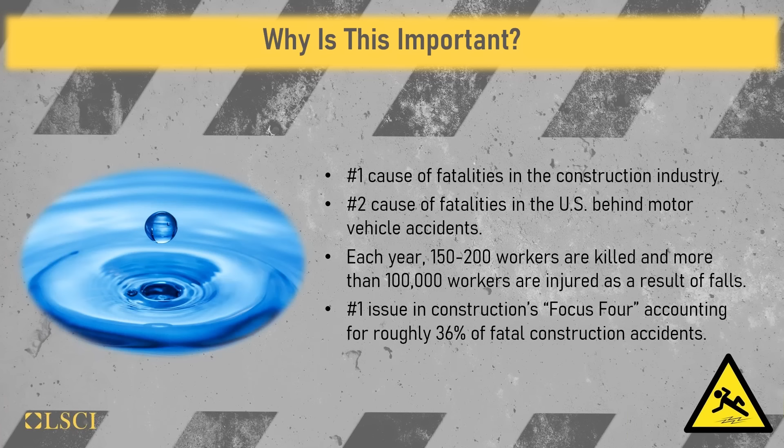As we now know, falls are the #1 cause of injury and fatality in the construction industry. Over 100,000 injuries and 150 to 200 fatalities are caused every year by falls. This number is absolutely unacceptable. As an employer, you do have a responsibility to understand and protect employees from the hazards and unsafe workplace conditions. There are a number of fall prevention and protection methods that are often overlooked or bypassed.

So before we get started talking about falls in more detail, let's take a quick quiz. Where do you think most falls occur in the construction industry? A, scaffolds, B, ladders, C, platforms, D, roofs, or E, A and D. Go ahead and take a minute to look this over and type in your answer to the chat box.

Alright, time's up. So where do most falls occur? The answer is E, falls from scaffolds and roofs.

Falls commonly happen from unprotected sides and holes, walking and working surfaces that are not constructed properly, improper use of equipment to access heights, failure to properly use a personal fall arrest system, and lastly, slips and trips caused by poor housekeeping.

Exactly, Emily. And while a majority of falls happen from heights of 11 feet or higher, many injuries and fatalities can also occur from falls on the same level or just a few feet off the ground.

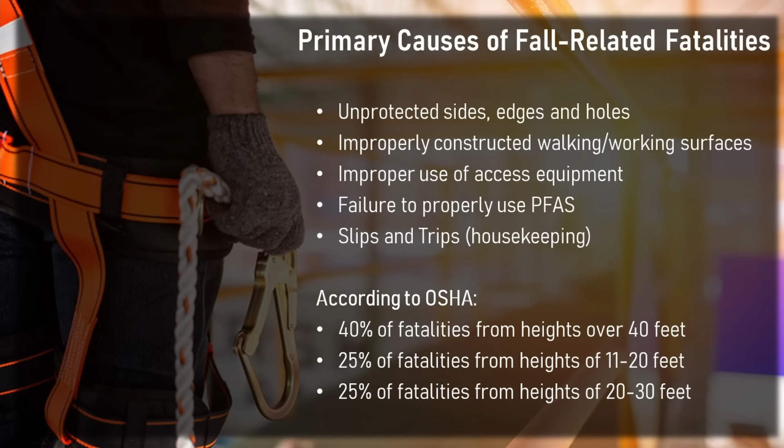You can't put a price on an employee's life, but these costs could have been avoided entirely with the right methods of prevention and protection. I refer you to 29 CFR 1926, the OSHA safety and health requirements for construction. Subpart M will give you a lot of detail on dimensions and placements, so we're not going to go into a lot of detail in this presentation today. Please refer to Subpart M for additional information.

Before we talk about the types of fall protection used in this industry, let's take another quiz. At what height is fall protection required in construction work environments? A, 5 feet, B, 6 feet, C, 7 feet, or D, 8 feet? Take a minute to read over the answers and put your answer into the chat box.

The correct answer is B, 6 feet. Fall protection is required when employees are working from a height of 6 feet or more above a lower level, or on walking surfaces where they could fall 6 feet or more into an excavation or opening. It's important that all work surfaces be inspected prior to work to ensure that the surface is strong enough to support the work being performed.

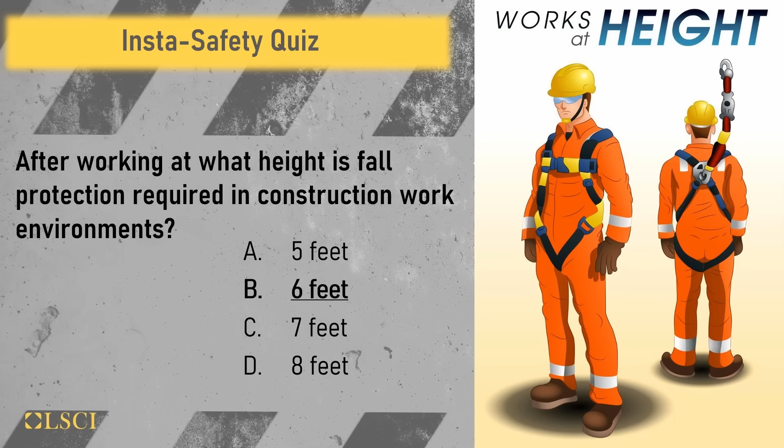Now that we've taken a look at that, let's take a deeper look at fall protection. When do you as an employee need to be protected from a fall hazard? As we just reviewed, OSHA requires that fall prevention or protection be provided for employees working in construction environments at heights of 6 feet or greater.

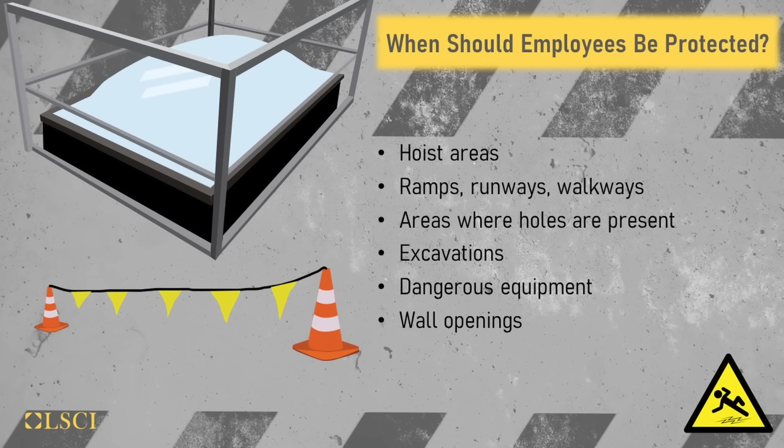That's absolutely correct. So let's look at some specific areas where fall protection is required by OSHA standards: working in a hoist area, moving materials to an upper level or taking debris down to a lower level; working in elevated areas such as ramps, runways, or walkways; areas where there are holes, which should be covered to protect employees from tripping or stepping into them. Covers should be marked, secured, and able to withstand 2 times any imposed load on them. Also, working near wall openings, windows, doors, etc., or when dangerous equipment is present below the work surface, as well as working in or near excavations.

There are many different ways we can protect employees from suffering a fall-related injury or fatality, so let's talk about some of these options. First off, safety nets, an option for fall protection whenever you're working in high-rise buildings. Safety nets have to extend at least 8 feet outside of the working surface, though that can also depend on the height of the working surface to begin with. Once constructed, these safety nets have to be inspected to ensure their integrity and make sure they would be safe to use if a fall were to occur.

Yes, safety nets are an excellent option in a variety of areas, not just high rises. Next up, we have guardrail systems. Most people are familiar with guardrails; they're commonly used to prevent an employee from being exposed to a fall hazard and suffering from a fall. To provide sufficient protection, guardrails must meet these requirements: first, the top rail height is typically 42 inches, plus or minus 3 inches, above the walking working surface. Second, a mid-rail is installed about halfway between the top rail and the working level, usually around 21 inches. Toe boards, if installed, help prevent objects or materials from falling into areas below; they're at least 3.5 inches high, not more than a quarter inch above the walking working surface.

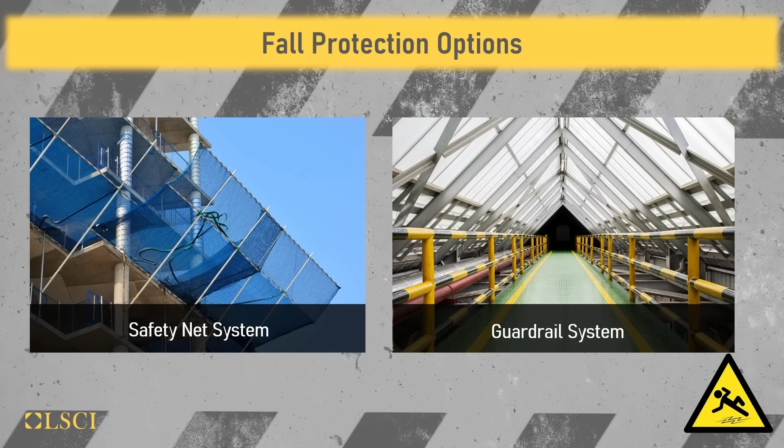Moving right along, we're now going to talk about warning lines. Warning lines are commonly used on roof areas to identify the areas in which work can occur safely without fall protection and where work cannot occur if fall protection is not used. So warning lines are used to warn employees of an unprotected edge. Essentially, a warning line system is a means to provide a visual warning of where work can and cannot be performed. To be compliant with warning line system requirements, the following must be met.

The lines used for warning lines are to be made of ropes, wires, or chains. The lines must be placed no less than 6 feet away from the edge, meaning if working more than 6 feet from the edge and within the warning line area, additional fall protection is not required. But if working past the warning line system and within 6 feet of the roof's edge, additional fall protection must be worn. The warning lines must also be set up to withstand tripping force of 16 pounds, and the lines must be constructed so the line is no lower than 34 inches, but also no higher than 39 inches.

It's important to note that for roof work or any other work occurring where warning lines are used, work cannot occur until after the warning line system is properly set up and providing that visual. So if the warning line area is not yet set up, work cannot occur near the unprotected edge, even if you are more than 6 feet back. You do need to have things set up and be in place properly before you can work without fall protection.

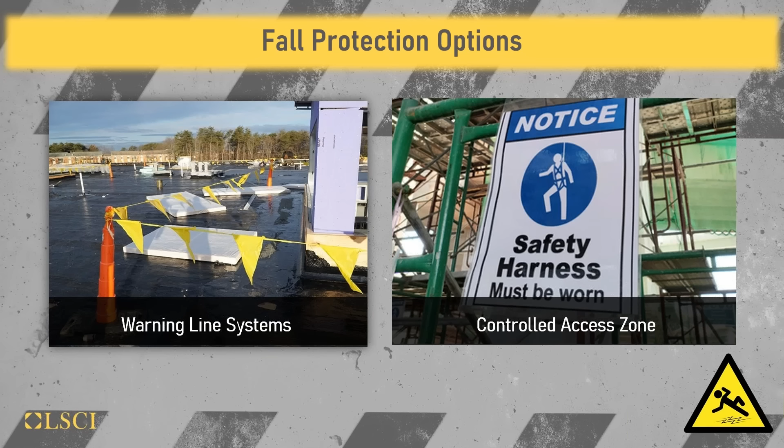These controlled access zones can be set up no less than 6 feet, but no more than 25 feet away from an unprotected edge. Once the area is set up with ropes, wires, or chains, they must be flagged with highly visible material at least every 6 feet. Controlled access zones are often used for roofing work, leading edge work where floors are being constructed, masonry, and other types of work.

Let's review safety monitoring systems. A safety monitoring system includes an employee that is designated to prevent workers from falling from the leading edge. It's commonly used in the roofing industry, where the safety monitor is responsible for watching employees in the working area to ensure that a fall does not occur, and the sole responsibility is the monitoring of employees.

The safety monitor must be able to communicate verbally with the employees in the work area, and they must always be able to see the employee that they're monitoring where the work is occurring. Should there be an increased chance of a fall hazard or the monitor sees the employee not working safely, the safety monitor does have the competency and the authority to stop the work and keep the employees safe. Any employees in the area must follow any directions given by the safety monitor.

The safety monitor can't have any other responsibilities that could take their attention away from the ones that they are monitoring. One thing to note about the safety monitoring system, there are restrictions. For example, OSHA asks that this be used on no greater than a 4:12 pitch type or flat roof. There are additional dimensional requirements for using a safety monitor.

Another option that is very popular is the personal fall arrest system. Guardrails and personal fall arrest systems seem to be the most common types of fall protection we see on projects. They include a personal harness connected to a lanyard with snap hook and D-rings, attached to an anchorage point capable of withstanding and sustaining 5,000 pounds of force. A personal fall arrest system must limit a person's free fall to no more than 6 feet.

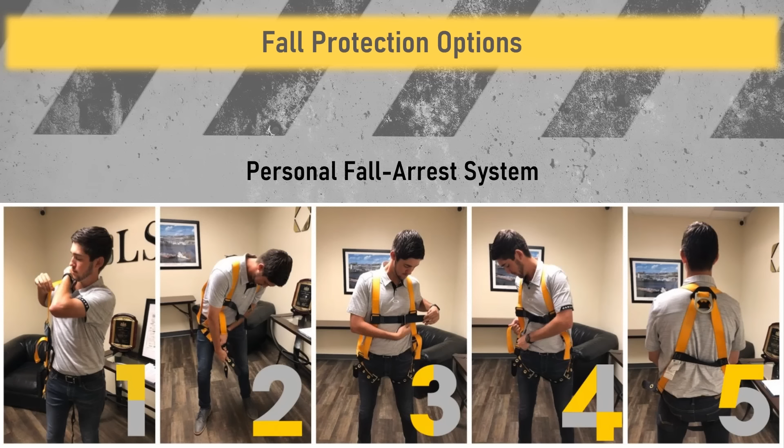For example, if a fall does occur, the personal fall arrest system limits the maximum arrest force to 1,800 pounds. Here we have an example of the proper way to put on a personal fall arrest harness. Prior to using the system, all components should be inspected by the trained user. Any defect found must be repaired, replaced, or taken out of service. I also recommend using the buddy system so people check each other, making sure the harness is donned correctly—snug enough to do its job, but not so tight that you can't do the work.

We are going to look a little closer at these components of a fall arrest system. We commonly refer to this as the ABCs of fall arrest systems. The A stands for anchorage, commonly referred to as the point where you are tying off—the connection point used to connect you to the point of anchor.

B stands for body wear, which is the personal fall arrest harness that goes around your body. C stands for connecting device, and this is the critical link that joins the body harness you're wearing to the anchorage point—this would be something such as a self-retracting or shock-absorbing lanyard.

There's a variety of options for personal fall arrest systems—take a look and find the one that works best for your kind of work. One common question is, what's with this 5,000 pounds at the anchorage point? I don't know any 5,000 pound people or 1,000 pound people. Well, it goes back to what I call applied physics: force equals mass times acceleration.

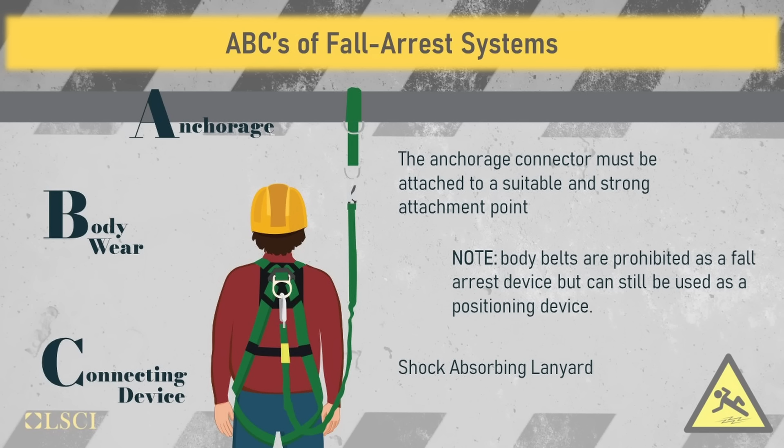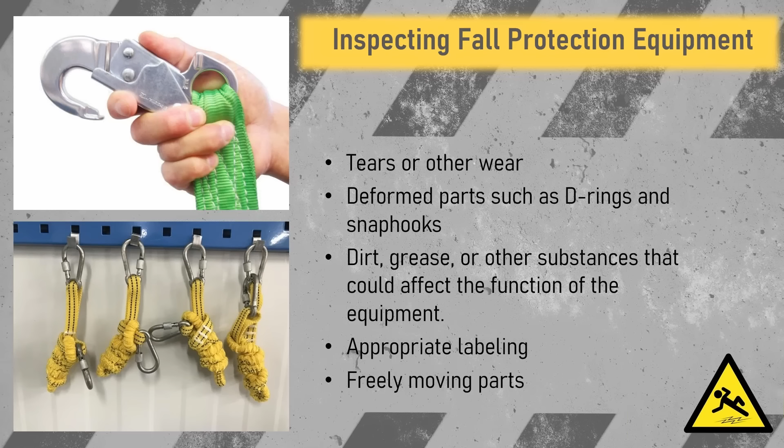Before an employee uses a personal fall arrest system, it is critical to inspect it to ensure it's in suitable condition. Here are some things to look for: first, take a look at any tears or signs of wear in the harness and lanyard. Look for any deformed D-rings or snap hooks. Look for dirt, grease, or other substances that could affect the function of the equipment. And check the labeling to make sure it's legible and ready to go. If any part of the fall arrest system does not pass inspection, it should be reported to a supervisor immediately and removed from service.

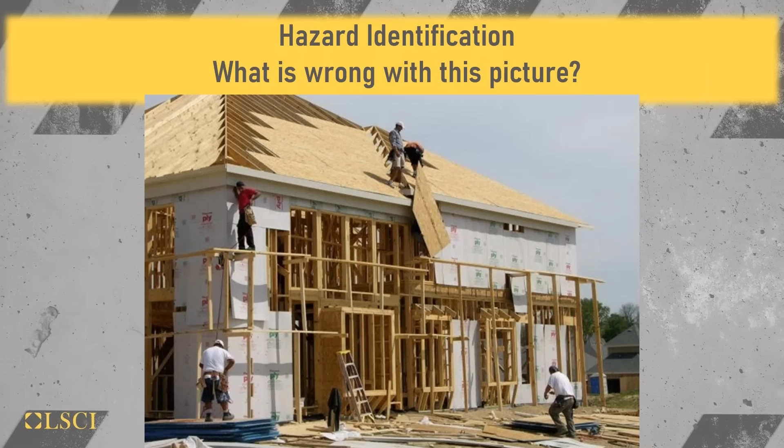We've learned a lot about fall hazards and when fall protection is required. Let's take a look at this picture—can you identify any areas where you see violations related to falls? There are quite a few in this photograph. No one, especially at the upper level, was wearing fall protection of any kind. The person holding onto the piece of sheathing in the red shirt is working more than 6 feet high and not protected by anything. In fact, neither of the two employees on the roof have any type of protection, and unfortunately they may be used to this type of work, moving around on surfaces like this. These instances put each employee at high risk for a fall, let alone dropping material that might strike someone below.

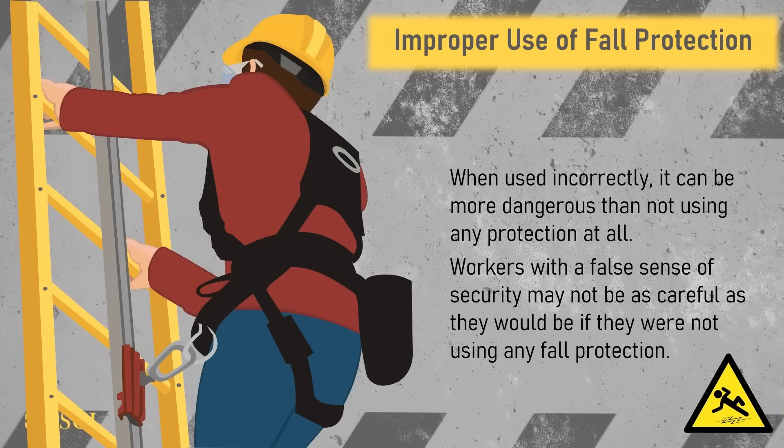Fall protection is meant to protect employees when they're exposed to a fall hazard. However, if used incorrectly, fall protection can be even more dangerous than not using anything at all. Just because you are wearing fall protection does not mean it's going to properly protect the employee. Poorly constructed or damaged fall protection can provide a false sense of security, making a fall much more dangerous if it were to occur.

So we just spent a good bit of time discussing falls today, and we really do thank you for your participation in all of our quizzes. But we are now going to move on to the next Focus 4 item, and that is struck-by incidents. Now, these account for over 10% of fatalities in the construction industry.

That's right, Emily. Struck-by injuries are just as it sounds—they're caused by a worker being struck by something. For example, the number one cause of highway worker fatalities is being killed by construction equipment or in temporary traffic zones by traffic that's maintained. Vehicles entering work areas are usually the result of driver error or an improperly erected temporary traffic work zone.

By the way, those of you that do this work, your best guide is something called the MUTCD, Part 6. That's the Manual of Uniform Traffic Control Devices, and it has wonderful information as well as examples of the proper way to set up temporary traffic zones.

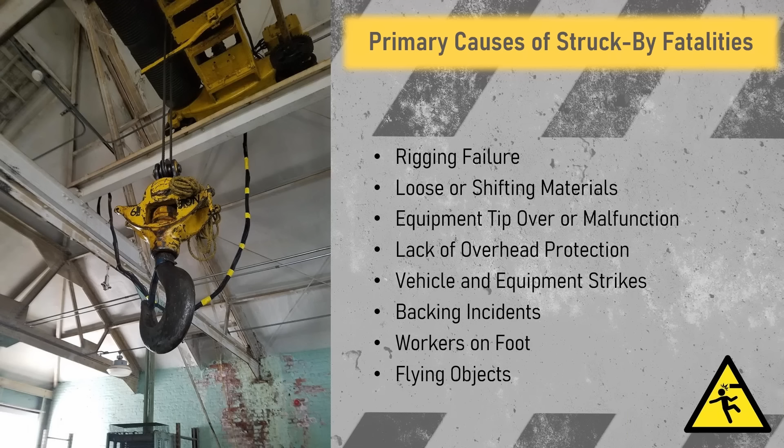Most workers on foot are either killed or run over by equipment, especially backing equipment, or some are killed by equipment tip-over or failure. For equipment operators, the most common cause of operator fatality is equipment rollover. Many passengers of equipment are killed because they weren't in a proper seat or were riding on steps, fenders, tailgates, buckets, etc., and fell off.

Another type of instance that would be considered a struck-by injury is something such as being struck by a falling object or falling piece of equipment. Up to 20% of crane fatality incidents are caused by being struck from crane tip-overs or other crane failures.

Emily, you're correct. Crane or equipment incidents that help us move material can cause serious injury and death. So it's crucial that any kind of slings or rigging be inspected prior to use and be rigged by a qualified rigger. For example, they will make sure that any nylon, chain, or wire rope slings have legible tags showing capacity, and the riggers must understand the capacities of whatever sling material is being used. Every sling should have a label on it showing this. And riggers need to know how to inspect slings and properly rig loads.

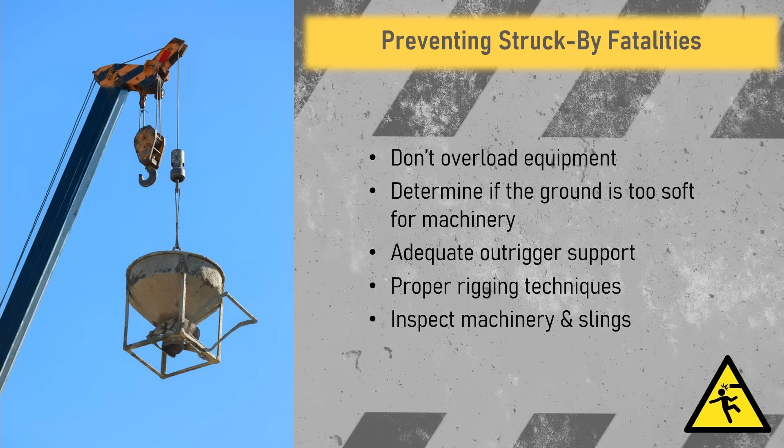With different types of struck-by fatalities, it's important to recognize instances where they can occur. Once identified, you can eliminate these hazards using the hierarchy of controls we'll talk about next on how to work safely. Another key is simply making sure people are in the correct position so no one is below a load that's being raised, picked, or placed, so that as the crane moves, no one's struck by the rear or the boom of the crane.

When considering equipment struck-by incidents, many tip-over incidents occur during the loading and unloading of equipment. Equipment can also slide off trailers or loading ramps. So equipment operators must be cautious when operating to ensure that they are always aware of their surroundings.

Yes, Emily, for those working on foot, high visibility clothing allows the operator to easily identify you. In fact, the requirement is you must be identified as a person from 1,000 feet away. I also think just because you have on high visibility clothing doesn't always mean the operator can see you. I recommend even the operator wear high visibility—it's another visual signal to keep the equipment doing its job and the walking and working personnel safe. Always ensure you're not in an equipment operator's blind spot or the shadow of an operator.

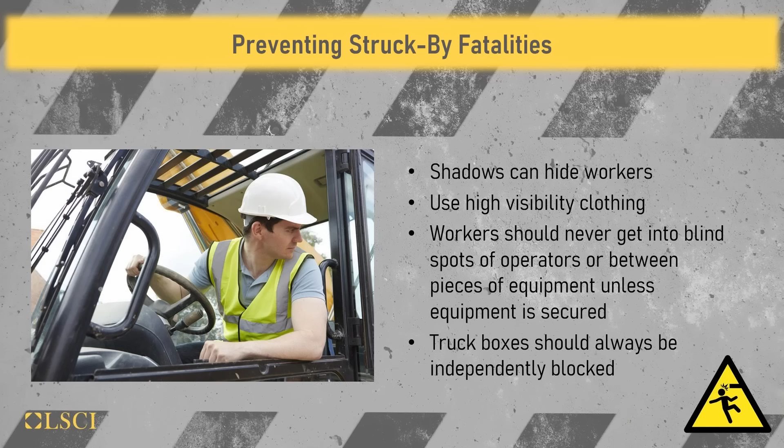A good rule of thumb: keep your distance from the equipment and allow the operator to communicate with you when it's safe to approach or cross its path. Don't try to slide by or get behind—that's when bad things happen.

Now, if a piece of equipment presents a rollover hazard, the operator is in harm's way, so they must be wearing a seatbelt during operation. If employees are performing work or maintenance on equipment, they should never be working under or between equipment parts that are supported by their own hydraulics. All equipment must be properly blocked and secured.

Yes Emily, when it comes to preventing struck-by injuries, it really comes down to a few key aspects: pre-planning, placement of equipment, operations, materials, and personnel. We want to make sure the folks doing the work are authorized and trained, that an inspection is run, a pre-operation check of equipment, and overview and oversight.

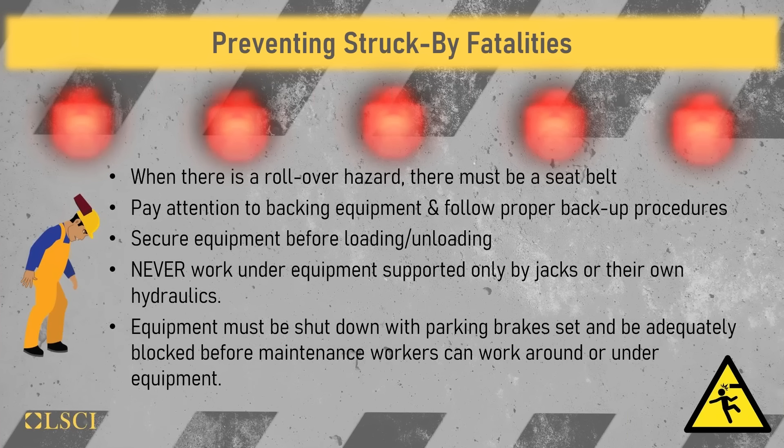If an incident ever occurs, it must be investigated to identify the root cause in order to evaluate for future planning, training, and oversight. The purpose is not to find fault, it's to find fact so that we can make sure it never happens again. Unfortunately, hindsight is always 20/20.

So the next focus for incident type that we will review is electrocution. This is just crazy to me, but did you know approximately 350 electrical related fatalities occur every year? That number just seems outrageous to me.

But before we get started, let's see what the audience knows about electrical hazards. For electrical equipment, which of the following options represents misuse of equipment? There could be more than one right answer. Options include: using multi-receptacle boxes designed to be mounted, fitting them with a power cord and placing them on the floor; fabricating extension cords with Romex wire; using factory assembled cord sets; using equipment outdoors that is labeled for indoor and dry locations only; using cords or tools with worn insulation or exposed wires; and using cords, connection devices, and fittings equipped with strain relief. Like I said, there could be more than one right answer here.

Emily, you're exactly right, there's quite a few here. The misuse items are: using multi-receptacle boxes that are designed to be mounted but fitting them with a power cord and using them as a jobsite extension cord, or fabricating extension cords with Romex or any other kind of wire; using equipment in an improper location—if it's rated for outdoors, use it outdoors, indoors, indoors; and using cords or tools with worn insulation or exposed wires.

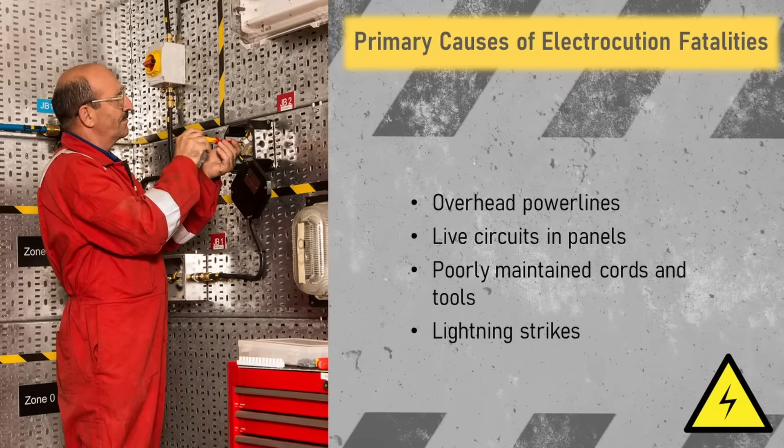So knowing how dangerous electricity is, how do we prevent electrical hazards that could lead to severe injury or worse? Well, one thing we can do is use a ground fault circuit interrupter, which prevents electric shock or electrocution if there were a faulty cord or tool. It's best to use a GFCI whenever possible because it monitors the current flow between the hot and neutral wires. It senses a change in amperage of 5 milliamps—that's 5 thousandths of an amp—plus or minus the actual power that tool or cord is using.

So for indoor electrical panels, obviously we don't want any loose or exposed wiring. We need to make sure wiring is protected by closed boxes. If we're working with a live panel, we have to make sure it's covered and has a hard cover to prevent any exposure or contact. Cardboard is not a solution here.

If an electrical incident were to occur, we've got to be careful of surrounding areas. We know that electricity's home is the ground, and it will find its way there, whether through us or equipment. So it's important we maintain proper distance. If you do have an incident, call for additional assistance or ask questions. Electricity is a wonderful tool for us to use, and it would be very difficult to perform in the construction industry without it. But like any other tool, we want to make sure we respect it and use it properly.

For outdoor electrical exposures, you always want to maintain a distance from overhead power lines. And it's not just personnel, it's equipment, ladders, scaffolds, cranes, forklifts, trucks - a minimum distance of 10-foot clearance from a 50,000 volt exposure. And for every 1,000 volts over 50,000 volts, you add additional distance. Whenever possible, best practice, add distance when working near overhead power lines.

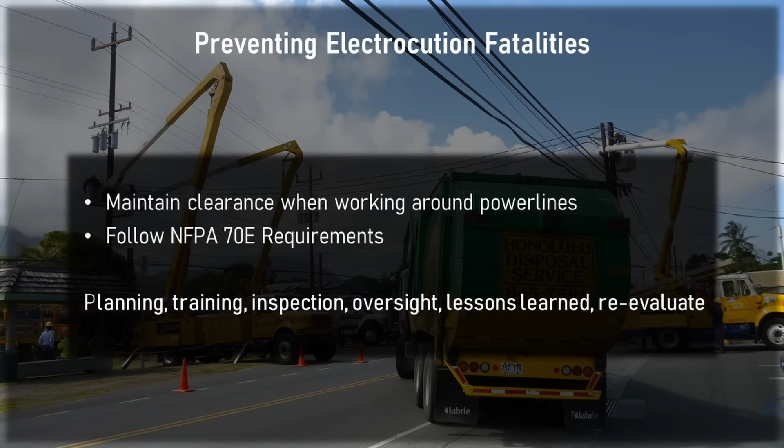So again, electricity is a wonderful, wonderful tool. But like any tool, we need to make sure we use it properly.

We are down to our last focus 4 incident category that we are going to talk about today, and that is the caught in between incident. These incidents occur when one or more employee is crushed or caught between an object and the ground, or an object and another object. Things such as congested work sites, heavy equipment operation, and multiple trades working in one area can all contribute to a caught in between hazard.

You are correct, Emily. One of the most dangerous things we do is excavation. And again, whenever we move dirt, the earth wants to heal itself. So caught in between can happen in other ways - trench collapse, cave-ins, rotating moving equipment, unguarded equipment parts, rollovers, equipment maintenance activities.

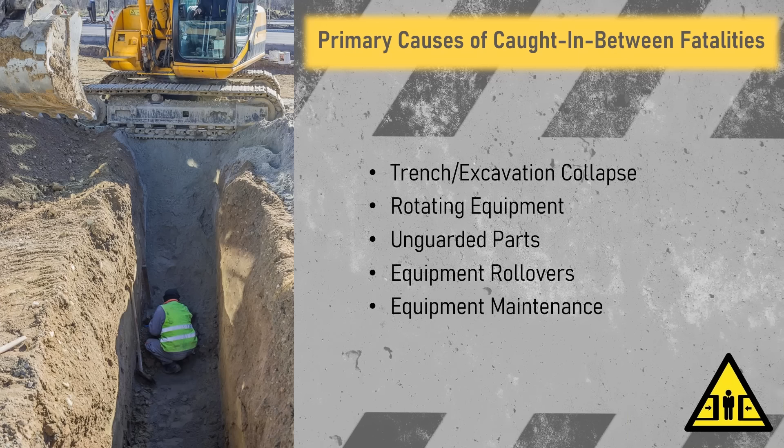You will not win that. In fact, we know that a cubic yard of dirt, which is typically how this is measured, stacked, stored, etc., weighs as much as a pickup truck. So if you're caught in between that, you are not going to win.

That's a great point, Dean. We do want to think about trenches and excavations specifically in terms of at what depth is protection required in order to prevent a cave-in. So let's take a look at this question: do we think it's A, 3 feet, B, 5 feet, C, 7 feet, or D, 9 feet? Take a minute to think about that and you can put your answer in the chat box.

Emily, the correct answer is, according to OSHA standards, 5 feet. If an excavation is 5 feet or greater in depth, it must be protected from cave-ins.

Absolutely, excavation cave-ins are extremely dangerous. It only takes a small amount of soil to cause serious injury. Just 2 cubic feet of soil can really restrict a buried victim and affect their ability to breathe.

Exactly right, Emily. Employees may be familiar with working in trenches or excavations, but the conditions and hazards are constantly changing - weather, equipment, personnel. So the key is all work needs to be performed by a competent person who not only understands the soil type they're working in, but is able to prevent dangers from a cave-in.

As we learned from the last quiz, any excavation 5 feet or greater must be protected, and you have several options: you can use benching and sloping, shoring, shielding, or a trench box. Now, for excavations less than 5 feet, if they pose a cave-in potential, they should also be protected to ensure employee safety.

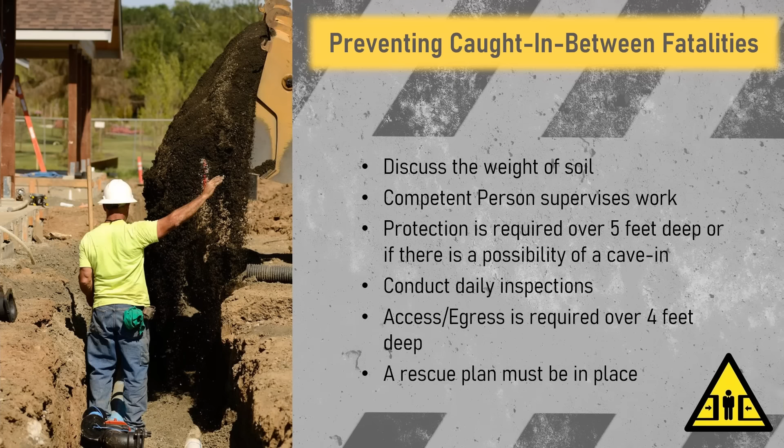Let's focus on the caught in between hazard. If a cave-in were to occur, most local first responders are not fully trained or equipped to perform rescue operations. So employees working in or near excavations must be aware of these dangers and be trained on the rescue plan and the equipment being used to protect them. We need to be very careful because the operation of doing this work can cause collapse. Additional cave-ins are often worse than the initial one and can trap victims and would-be rescuers, creating more soil pressure and injuring a victim more severely. It's not uncommon for an excavation cave-in to become more dangerous and complex as the event continues.

So we'll now shift gears and look at crane operations that can cause caught in between hazards. When crane booms are being dismantled and the pins are removed, the boom of the crane is not fully supported. This can cause the boom to fall and cause a caught in between incident. There must always be a plan in place for the safe dismantling of cranes for this reason.

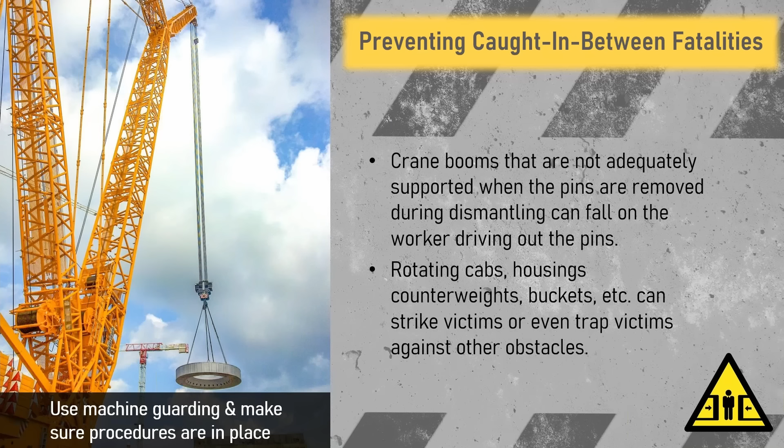Emily, you're correct. And there's other parts of the crane too—the rotating cab and counterweights can strike victims or trap them between other obstacles. You know what that means? The crane's radius and operation need to be properly barricaded, and no other employee should be permitted in the crane operation area. Subpart CC of the OSHA construction standard gives a detailed look at the qualifications of crane operators, signalers, riggers, and disassembly personnel. It's key that you follow those minimum requirements and more to make sure you do not have struck-by hazards when dealing with cranes and derricks.

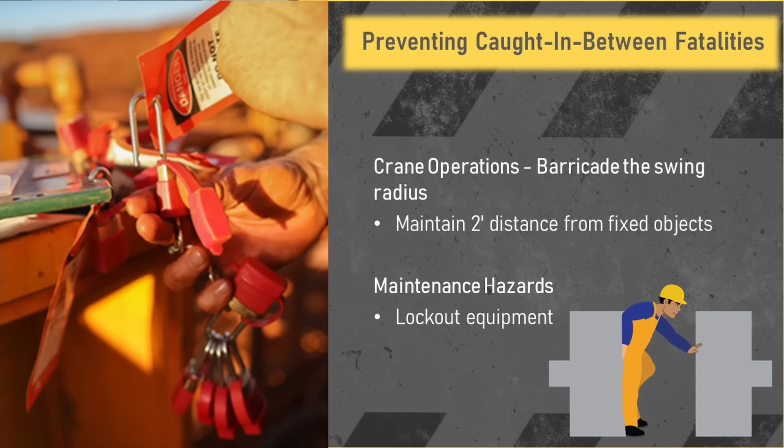During crane operations, you want to maintain a minimum of 2 feet distance from any fixed objects. If maintenance needs to be performed on the equipment, it must be done properly with lockout tagout to avoid any moving parts. We can't stress enough how many aspects go into crane operations that need to be looked at, reviewed, and trained on prior to anything happening on site. There was a major revision finalized in 2018, and I refer the audience to Subpart CC, Cranes and Derricks in Construction, for additional details and information.

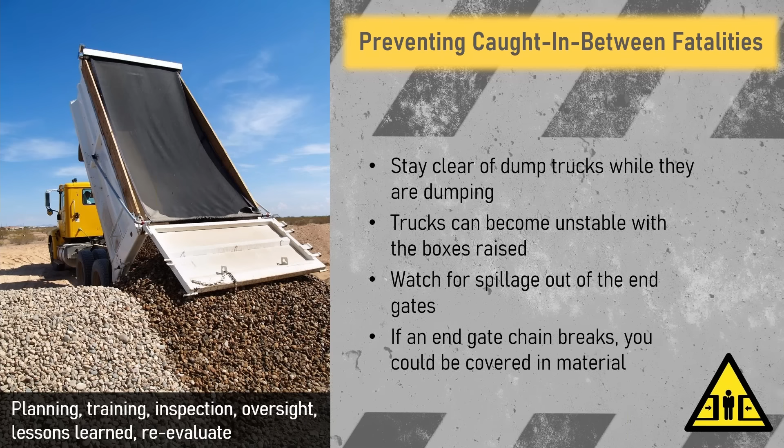Something else to consider when working your equipment, especially dump trucks, is that these trucks can become unstable when the box is raised. If there were a tip over during dumping operations, it would certainly create a caught in between hazard. So personnel need to maintain distance from a truck that's in active operation, as well as the material being unloaded. And the drivers should always remain inside the cab.

Thanks, Dean. We've gotten through a lot of content today, but in summary, we really want to make sure you understand the top 4 most fatal incidents in the construction industry—what OSHA refers to as the Focus Four. Falls come in first at over 36%, with struck-by, electrocution, and caught in between incidents not too far behind.

Yes, Emily, it's unfortunate. Today, 15 will be killed at work, two-thirds of those in construction. Today, 3,000 people will be injured at work, two-thirds in construction. So the incidents and examples reviewed today only scratch the surface of prevention.

There are key aspects to keeping your workers safe, among them planning, training, inspecting, and maintenance oversight. And if an incident does occur, it must be fully investigated to identify the root cause and learn valuable lessons. This investigation helps you reevaluate work practices and prevent future incidents. And if you think safety is expensive, try an accident—not just financially.